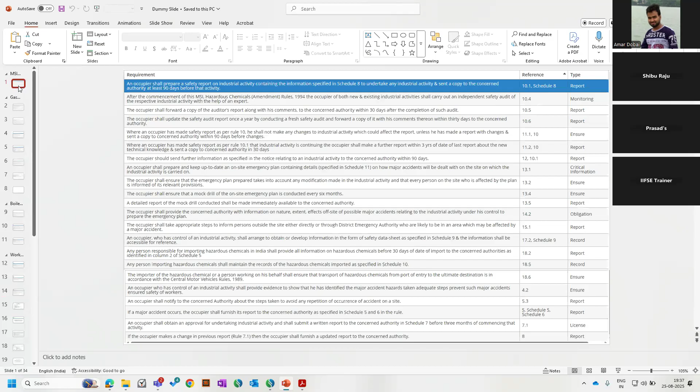Okay, thank you. So as of now we have seen Factories Act and Factories Rules, MSIHC rules as well as gas cylinders rules, and we covered the Boiler Act. We also covered workman compensation, then environmental protection rules. I request everybody please be in mute. Then we covered the pollution rules and water, and we have seen air and noise pollution rules as well.

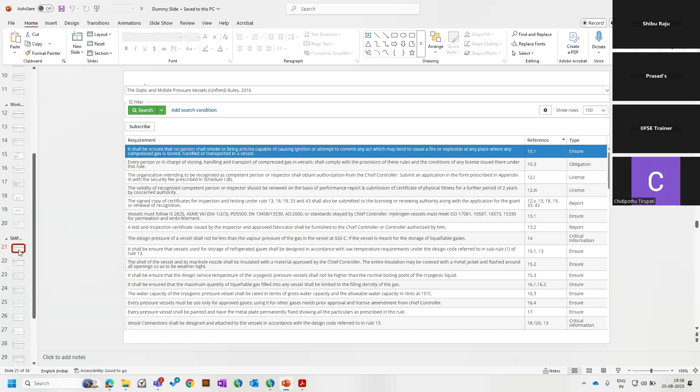Okay, so today we'll start with SMPV rules, static and mobile pressure vessels, which are unfired, so there is no fire involved. These pressure vessels are basically used for storage and transportation purposes of certain gases.

So these are the straight away requirements. As I said, some examples will be storage of LPG bullets or CNG bullets or propane bullets. Bullet in the sense, if the containers have capacity of 2 ton, 3 ton, 4 ton, 5 ton, or 10 ton, in industry language they used to call them bullets. These vessels or bullets are stored above ground or underground.

And also some of the trucks and tankers, which we would have seen traveling on the roads for the transportation of CNG or LNG or LPG, also come under these static and mobile pressure vessels. When I say static, they won't move, they'll be fixed installations at the site. When you say mobile pressure vessels, these are nothing but road tankers which we use to transport various gases.

Okay, number one, the first requirement: it shall ensure that no person shall smoke or bring articles capable of causing ignition, or attempt to commit any act which may tend to cause fire and explosion at any place where compressed gas is stored, handled, or transported in a vessel. So we have to ensure that.

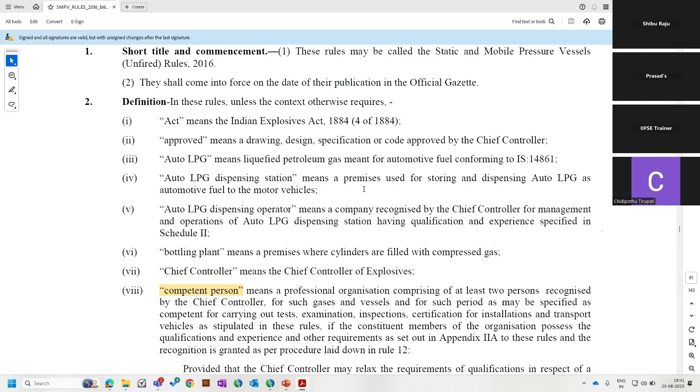So here they have given 10.3, I'll zoom it. So this is from the Ministry of Commerce and Industry. Okay, these are the special provisions.

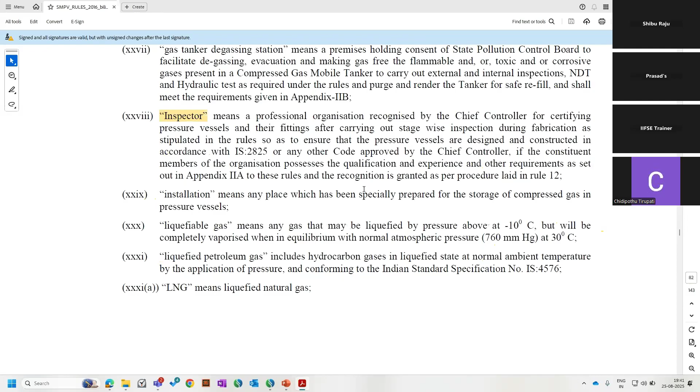Prevent any person from committing any act referred to in this sub rule 1. Every person storing compressed gas in a vessel, and every person in charge of or engaged in the storage, handling, and transport of such gas in vessels, shall at all times comply with the provisions of these rules and observe all precautions for prevention of accident by fire and explosion, or prevent any person from committing such acts referred to in this. This is the sub rule.

When I say main rule, the main rule is the precautions, special precautions against accidents. When you say another one, it is sub rule 1. Okay, so these are the various provisions they have to follow.

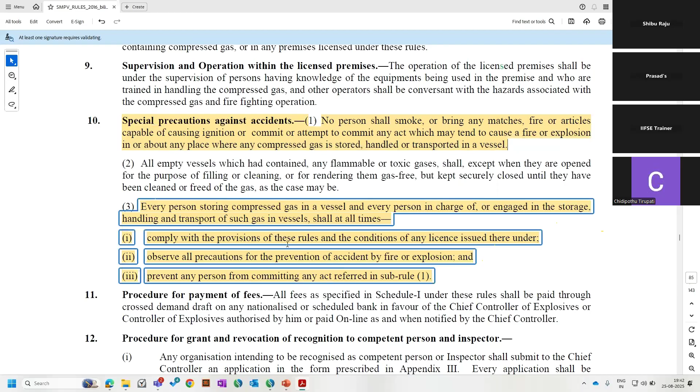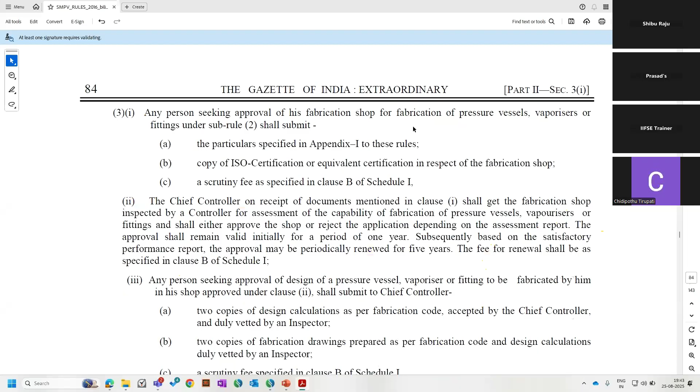And the organization intending to be recognized as a competent person or inspector shall obtain an authorization from the chief controller, submitting an application in the form prescribed in Appendix 3 with the scrutiny fee prescribed in Schedule 1b. So any organization which wants to act as a competent person—for example, we used to see TPI, third party inspectors—if they want to act under these SMPV rules, they have to get authorization from the chief controller with the specified applications: the form in Appendix 3 with the scrutiny fee mentioned in Schedule 1b.

So who is meant by competent person? We have seen the definition of competent person in the Factories Act. So here also, it's a similar way.

It means any professional organization comprising of at least 2 persons recognized by a chief controller for such gases and vessels and for such period as may be specified as competent for carrying out tests, examination, inspections, and certification for the installations and transport vehicles as stipulated in these rules. They will be called a competent person.

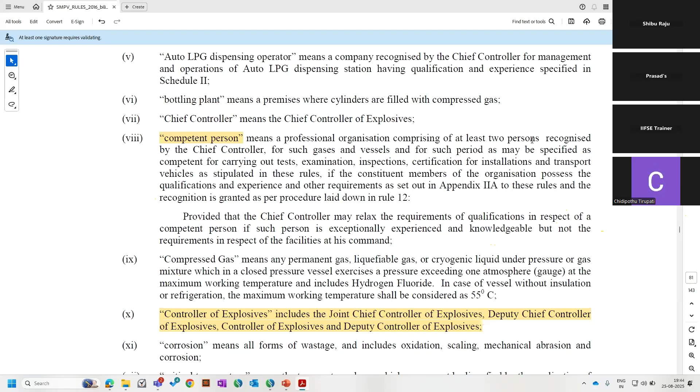So here the chief controller will give the authorization for these people. Okay. Any organization comprising of at least 2 persons. If you say any company as a TPI company, they should have a manpower of minimum of 2 and above. Okay. These are the various designatory people

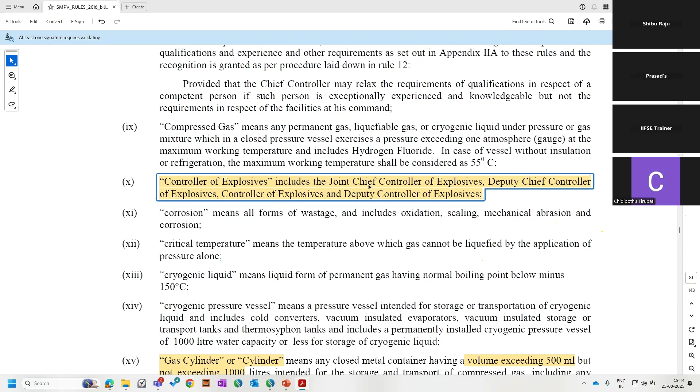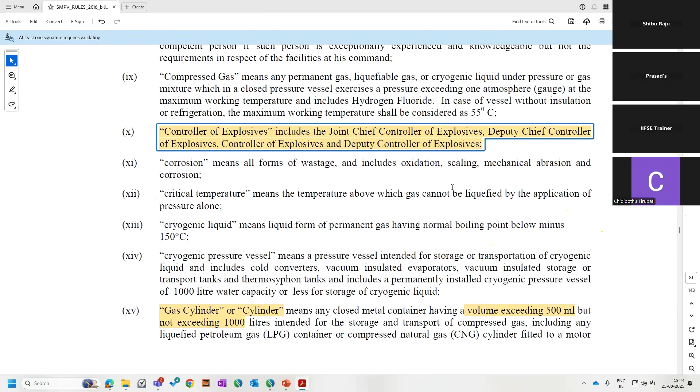who act as an authority: chief controller of explosives, joint chief controller of explosives, deputy chief controller of explosives, or controller of explosives, or deputy controller of explosives. Like for us, inspector of factories, deputy inspector of factories, or chief inspector of factories, like that.

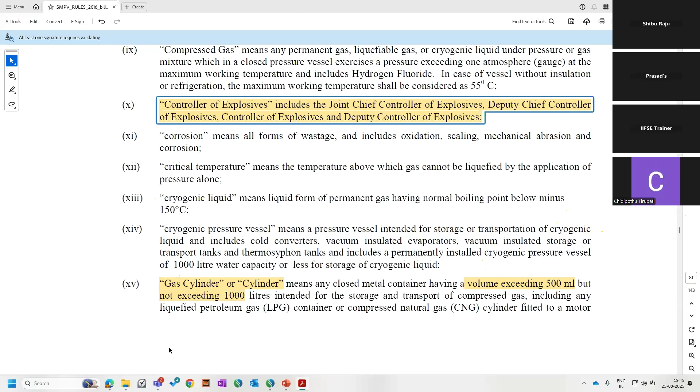Okay. When I say cylinder, we should know the definition. When I say pressure vessel, it is above 1000 liters. When we say cylinder, the volume exceeds 500 ml but does not exceed 1000 liters, intended for the storage of any compressed gas. Okay, that is the difference with a gas cylinder. This we have seen in the Gas Cylinders Rules 2016.

When we say inspector, it means any professional organization recognized by a chief controller for certifying pressure vessels and their fittings after carrying out a stage-wise inspection during fabrication as stipulated in the rules, so as to ensure that the pressure vessels are designed and constructed in accordance with IS 2825.

So here, an inspector, during the fabrication of these vessels, in the sense during manufacturing of these vessels, will do a stage-wise inspection to meet IS 2825. Okay.

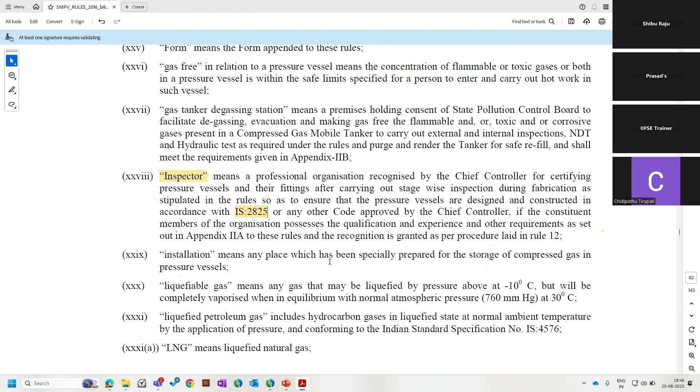Then a pressure vessel means a closed metal container of whatever shape, intended for the storage and transport of any compressed gas, which is subjected to internal pressure and whose water capacity exceeds 1000 liters. So here the capacity of a pressure vessel is 1000 liters and above, and the pressure is above atmospheric pressure. Okay. And these are the few equipments which do not come under pressure vessels, which are unfired.

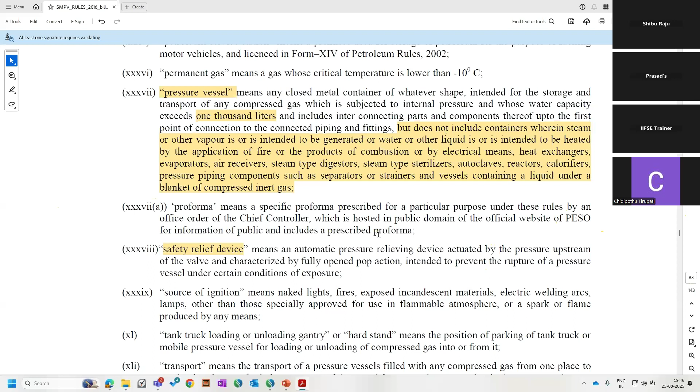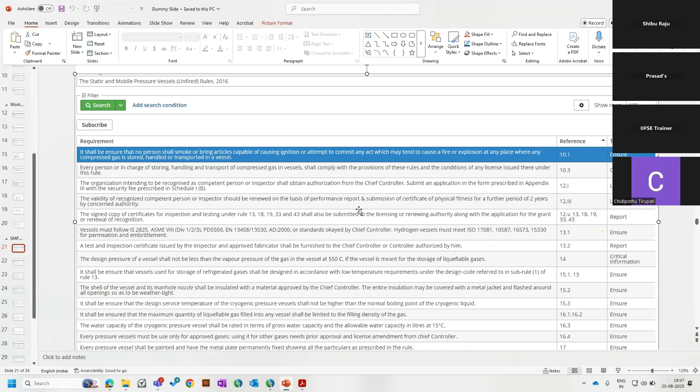Okay. The validity of a recognized competent person or inspector should be renewed on the basis of a performance report and submission of a certificate of physical fitness for a further period of 2 years by the concerned authority. So the inspector or competent person has to take renewal; licenses initially recognized under clause 1 or clause 2 shall be valid for 1 year.

Subsequently, on a performance report and submission of a physical fitness certificate obtained from a government hospital, the validity of recognition may be renewed for a further period of 2 years at a time up to attaining the age of 70 years. So until 70 years, they can act as an inspector or competent person.

Initially, they will get it for 1 year, and later, upon submitting the renewal with the valid recognition and also the physical fitness certificate, they'll have a validity of every 2 years up to 70 years. They can do a renewal.

Then a signed copy of certificates for inspection and testing under Rules 13, 18, 19, 33, and 43 shall be submitted to the licensing or renewing authority along with the application for grant or renewal of recognition. Basically, a signed copy of certificates for testing under these sections shall be submitted to the licensing authority along with the application.

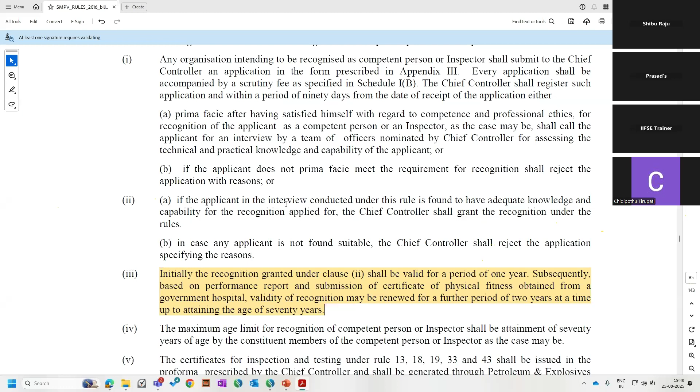Well, see 13. First is the design code, on what basis the design of the vessel has been done. Then we have 18. I'm not going through all the details because it is not necessary. Here we should only understand this requirement. 18 is talking about the fittings, and 19 is talking about the periodic testing of the pressure vessels and services, and 33

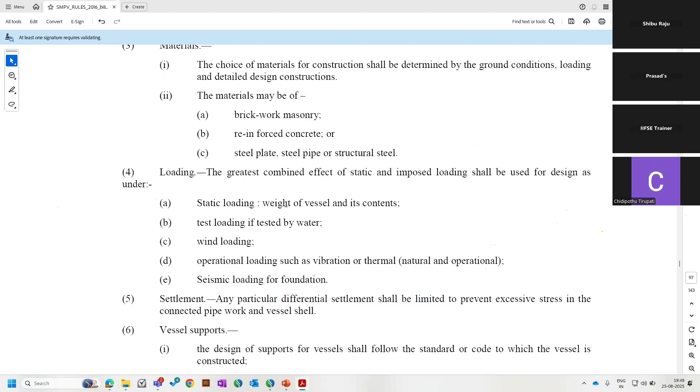is talking about the certificate of safety. Also we have 43, it is about the certificate of safety. So we have to submit these under these sections for getting a renewal for your vessels. Okay. And the vessels must follow IS 2825 or ASME standards.

And other standards which are mentioned here, okayed by the chief controller. Hydrogen vessels must meet the ISO standards. And also a test and inspection certificate issued by the inspector and approved fabricator shall be furnished to the chief controller or controller authorized by him.

So here it is a report requirement. So the test and inspection certificate issued by the inspector and approved fabricator shall be furnished to the chief controller, so that he will get the authorization for the filling of a specific vessel.

The design pressure of the vessel shall not be less than the vapor pressure of the gas in the vessel at 55 degrees Celsius if the vessel is meant for the storage of any liquefiable gases. When I say vapor pressure, liquid to vapor ratio. For example, a drop of a liquid occupies a lesser volume. One drop of a liquid, when it converts to gas, will occupy a higher volume. So that aspect they have to consider.

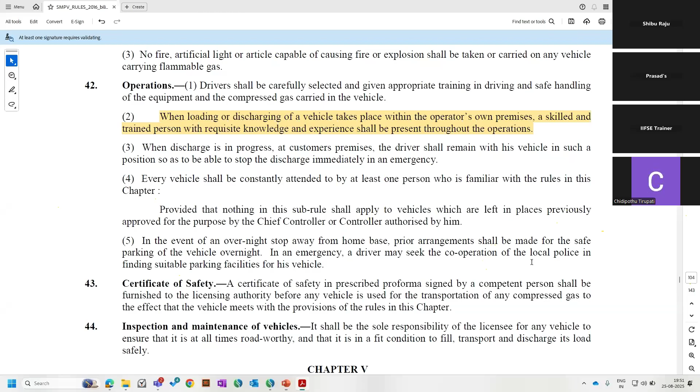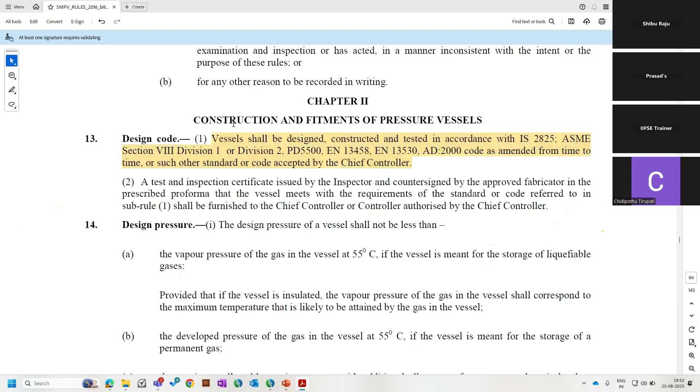It shall be ensured that the vessel used for the storage of refrigerated gases shall be designed in accordance with the temperature requirements under the design code referred in sub rule 1 of rule number 13. These are the design codes. So they have to follow the design codes while manufacturing any vessels which they are using for the refrigerants.

So the shell of the vessel and its manhole nozzle shall be insulated with a material approved by the chief controller. The entire insulation may be covered with a metallic jacket and flashed around the openings so as to be weather tight. It is basically setting up a jacket to protect the gases from the outside temperatures.

And it shall be ensured that the design and service temperatures of the cryogenic pressure vessels shall not be higher than the normal boiling point of the cryogenic liquids. Then it shall be ensured that the maximum quantity of the liquefiable gases filled into any vessel shall be limited to the filling density of the gas. So based on the density of the gas, you have to fill that. When it's density, the weight of the gas has to be ensured.

And also the water capacity of the cryogenic pressure vessels shall be rated in terms of gross water capacity and the allowable water capacity in liters at 15 degrees. So when I say cryogenic, these are filled based on the water capacity of the vessels at 15 degrees centigrade. And every pressure vessel must be used only for the approved gases.

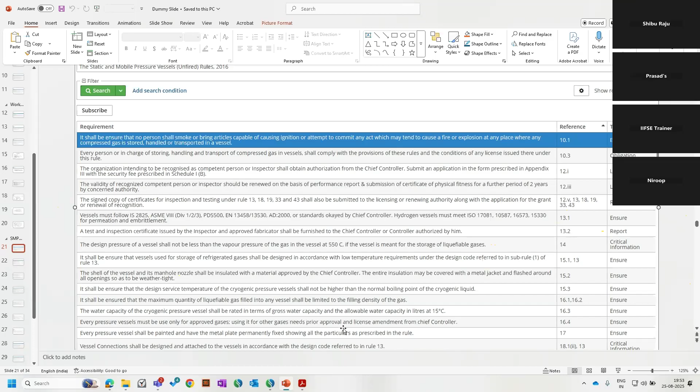Using it for other gases needs prior approval and also a license amendment from the chief controller. Same way like for gas cylinders, if you are changing from one gas to another gas, we need to get the approval. Same way, if you are changing the pressure vessel from one gas to another gas, here also you should get the amendment of the license for that vessel from the chief controller.

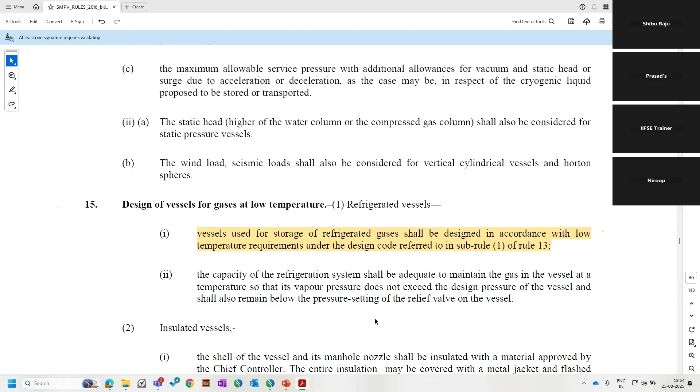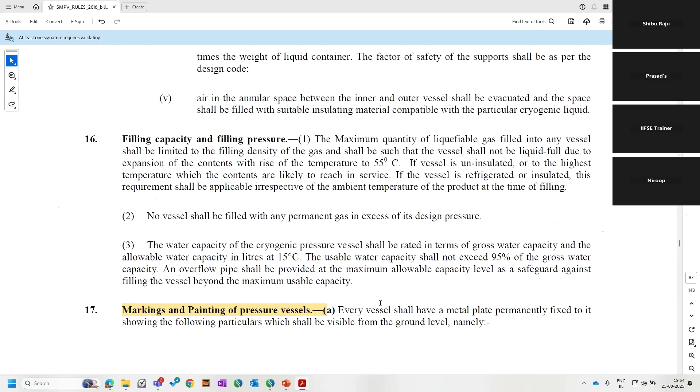And every pressure vessel shall be painted and have metal plates permanently fixed, showing the particulars prescribed in the rules. We'll see what are the particulars. Rule number 17, marking and painting of the vessels. So, what are the various details to be marked? Every vessel shall have a metal plate permanently fixed to it, showing the following particulars, which shall be visible from the ground level: manufacturer name, chief controller approval number.

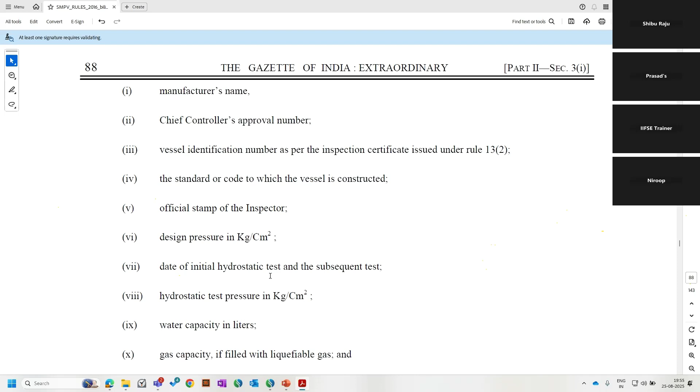For each vessel, you have a unique approval number, vessel identity number, the code or standard to which the vessel is constructed, official stamp, design pressure, date of initial hydro test they perform, hydro test pressure in kg per centimeter square, water capacity, gas capacity and other details. These are the various details which have to be permanently displayed on the vessel. And vessel connections shall be designed and attached to the vessels in accordance with the design code.

Sir, how will they conduct the hydrostatic pressure test? So basically, they will fill water up to 70% or 80%, then they will pressurize to see any cracks or leakages, etc. When I say hydro, it is nothing but water. They will fill the water, then they will apply pressure.

Sir, these all come under which question? These all come under IS 105 with respect to static and mobile pressure vessels rules. No, it is not a question. It is one of the topics in IS 105. There might be a question on this topic, or there might not be a question from this topic. Okay, this is one of the topics.

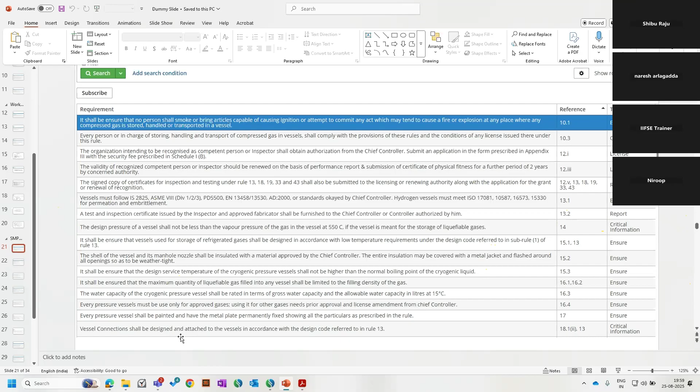Okay. So we talked about particulars or the things which are supposed to be marked on the vessels, and also the vessel connection shall be designed and attached to the vessel in accordance with the design code referred in Rule 13. So in Rule 13, we have various design codes. The vessel fittings have to meet the requirements of those codes.

Okay. Then another requirement: every vessel shall be provided with 2 or more pressure relieving devices in accordance with the provisions of the design codes under rule number 13. So 2 or more relieving devices, nothing but pressure relieving devices, have to be installed as per the code. As per the code, in the sense, maybe in the code they would have mentioned the quantity of the pressure relief devices.

And also every vessel shall be provided with at least one pressure gauge. So when you say at least, you can keep 2 or more, but for one vessel, one pressure gauge must be there to understand the pressure of the gas which is inside. And also the valves to the cryogenic pressure vessels for hydrogen must comply with ISO 21011 or any standard or code which is accepted by the chief controller.

So the valves which they use in these vessels have to meet this standard. Otherwise, any other standard which is accepted by the chief controller also can be used. Valve in the sense, for movement of the material from the vessel to the pipelines, or just for flow of the material, or to take the gases or material out of the vessel, like ball valve, gate valve, such kind of valve.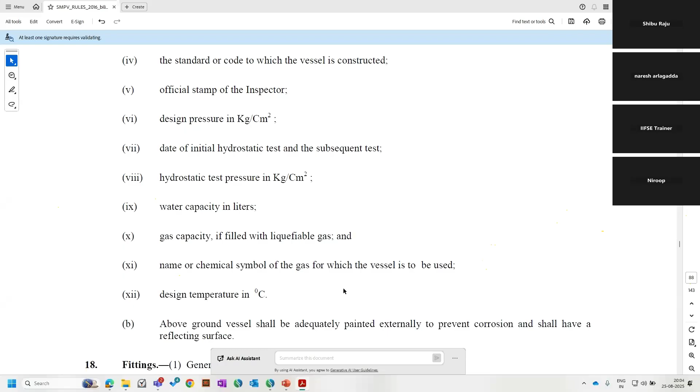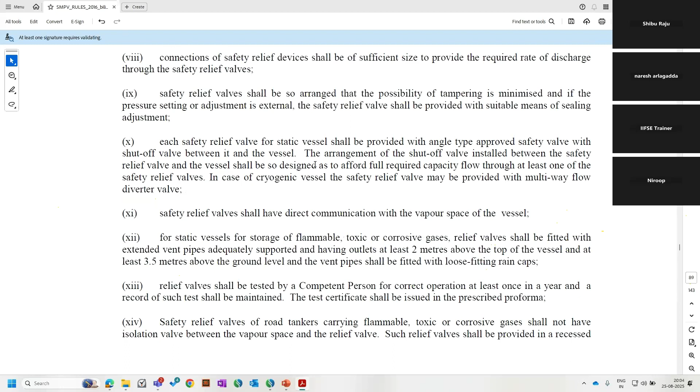Shall be subjected to non-destructive testing and also hydro testing at intervals specified in these rules, which is 19.5. It's 18. So the ammonia Horton sphere is periodically examined after 2 years of its installation, and the inspection shall consist of detailed non-destructive testing of the vessel.

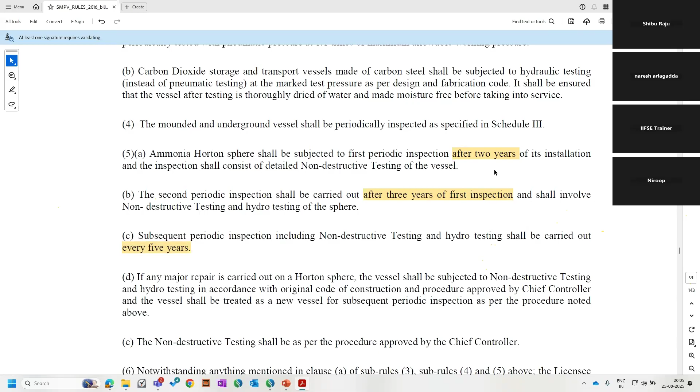Also, a second periodic examination shall be carried out after 3 years of the first inspection and shall involve non-destructive testing and hydro testing of the sphere, and subsequent periodic inspections include NDT. Hydro test shall be carried out every 5 years. Here, the first test is after 2 years of installation, and then after 3 years from the first inspection.

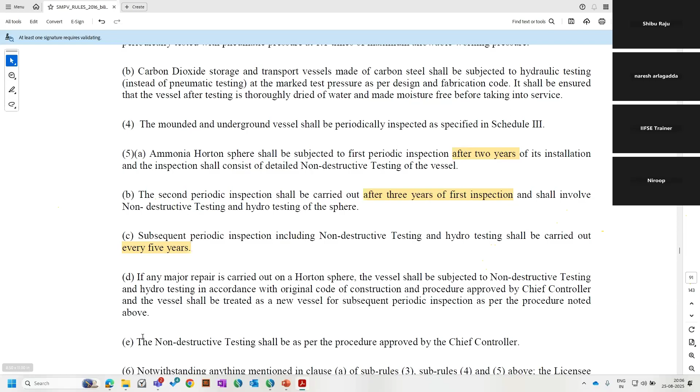For example, it is installed in 2010. You do it in 2012. Then in 2015 you do a second test after the first inspection. From there you do it every 5 years. For example, 5 years on, in 2020 you do a testing. From there, every 5 years you go for subsequent periodic inspections. Okay.

In the case any major repair is carried out on a Horton sphere, the vessel shall be subjected to NDT and hydro test with the original code of construction and also a procedure approved by the chief controller. In the case any repair happens, 19.5D. So this point.

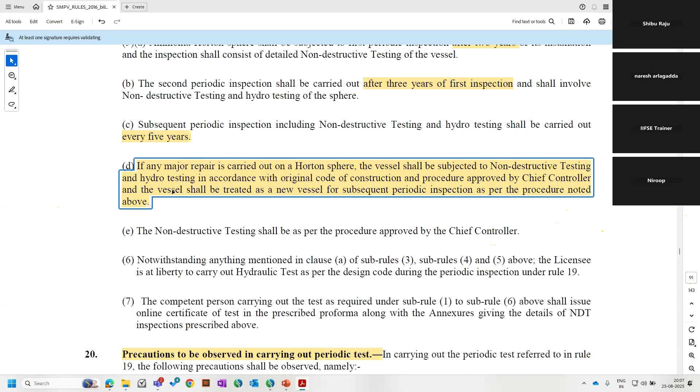So if any major repair is carried out on a Horton sphere, the vessel shall be subjected to non-destructive testing and hydro testing in accordance with the original code of construction and procedure approved by the chief controller, and the vessel shall be treated as a new vessel for subsequent periodic inspection as per the procedure noted above. So they have to do a periodical inspection in the case any major repair is carried out.

During the periodic inspection, rule number 19, the licensee, which means the owner, may perform a hydro test as per the design code for hydrogen vessels, and fitness assessment must follow API 579. It is American Petroleum Institute 579, and the standards under rule number 13 or others approved by the chief controller. So they have to follow those tests based on these designs and also the codes.

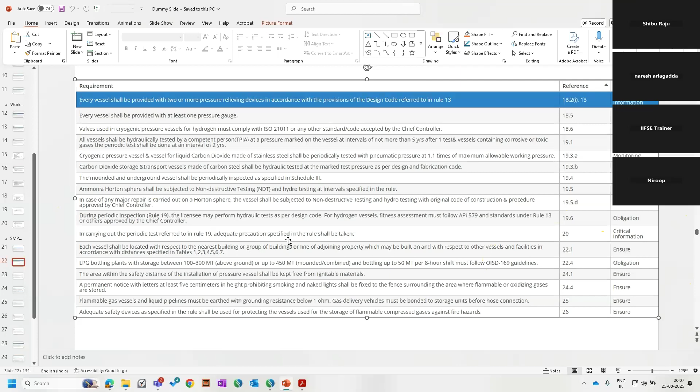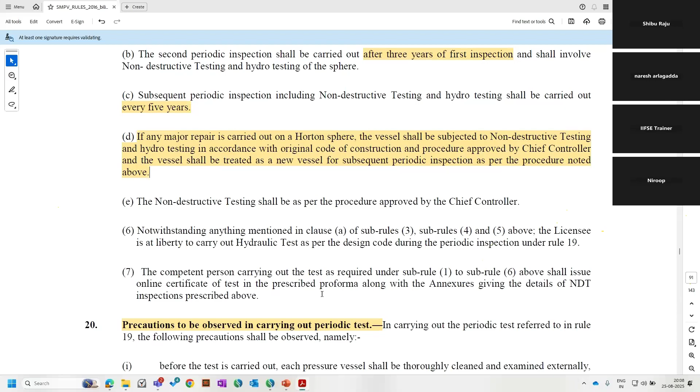In carrying out the periodic test, with reference to rule number 19, adequate precautions specified in the rule shall be taken. So there we have to take the appropriate precautions as a safety requirement. What are the various precautions to be taken care of? Before the test is carried out, each pressure vessel shall be thoroughly cleaned and examined as far as practicable internally, also for surface defects, corrosion or foreign matter. During the process of cleaning and removal of sludge, due precaution shall be taken against fire and explosion, etc. Okay.

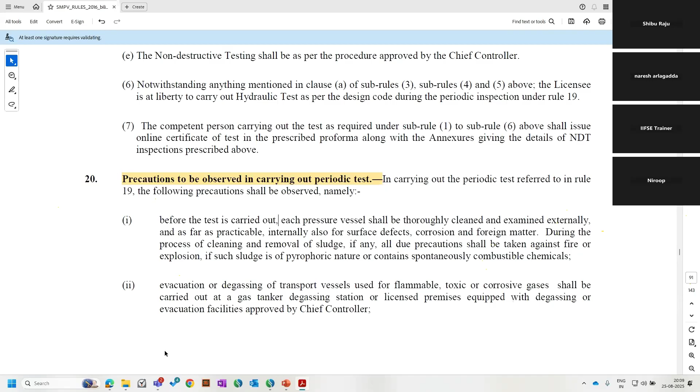And also evacuation or degassing of transport vessels used for flammable, toxic, or corrosive gases shall be carried out at a gas tanker degassing station, licensed premises equipped with degassing or evacuation facilities approved by the chief controller. So if it is a roadside tanker vessel, it has to be taken to the degassing station where they have a facility to degas the vessel and carry out the testing of the vessels.